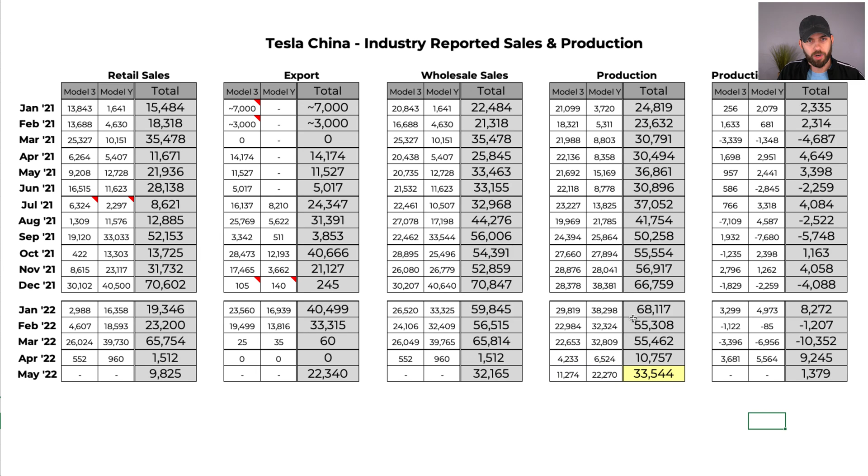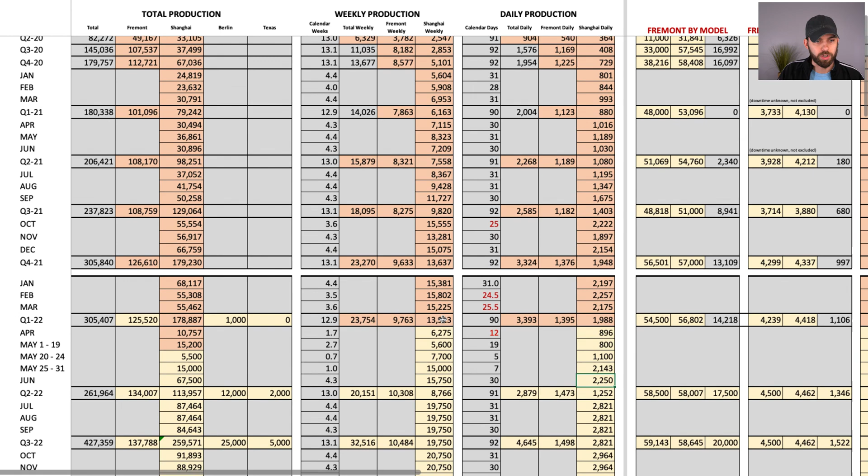So first I want to zoom in on where we were before this, what we were mapping out based on some of the rumors we had heard. This had put May at around 35,700 as the last forecast, based on Tesla hitting that 2,500 per day production rate around May 25th. That would have given them roughly 15,000 vehicles produced through the end of May, putting us around 35,000. So they didn't quite get to that.

But then for June, previously Reuters reports had put June production at around 15,750 per week, and now they're saying target of 71,000. We can go back to that article, but they also said from June 13th they're targeting weekly production of 17,000 vehicles per week, which would be higher than what we've got in here. So anyway, that was mapping out to like 262,000 vehicles produced for the quarter.

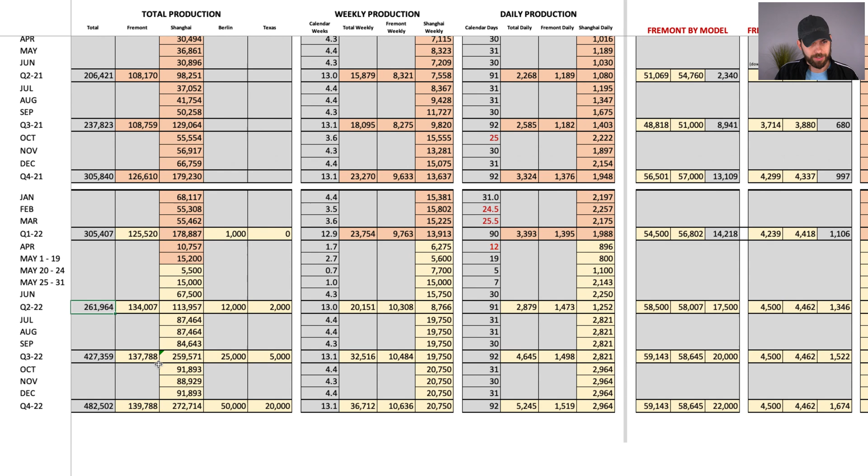If we flip over to this updated scenario with our known May quantities, I've just put the numbers in there for May. So we're at 33,500. I have those broken up by the different time periods we have information on for May. And then if June comes in at 71,000, that would put Q2 for Shanghai at 115,000.

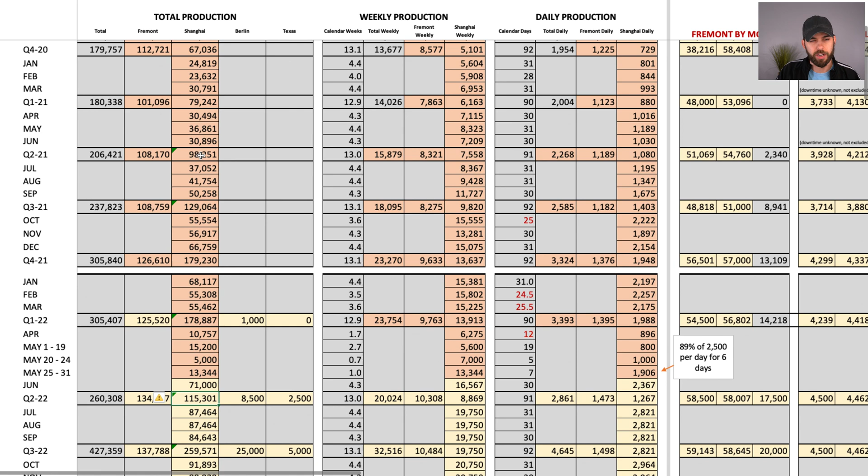That would be slightly up from last year, just because I believe there were some shutdowns going on - I can't remember exactly what was happening last year. I'd have to look back, but it would actually have Shanghai up from last year, but still down pretty significantly, about 60,000 vehicles quarter over quarter, which is just going to be too much of a stretch to make up from the combination of Fremont, Texas, and Berlin.

So if we assume some sequential increase here from Fremont, which looks like things have been trending in that direction, maybe 134,000 up from 125,000, and then maybe we're getting like 10 to 12,000 out of Berlin and Texas combined.

I'm hoping this is a little bit low for Texas at 2,500 in here, now that we're starting to see these deliveries and Tesla seeking out more buyers. But I think Berlin has been trending a little bit slower than what we might have had earlier in the quarter. Anyway, all these things combined are, to me, shaking out somewhere around 260,000 for production.

And again, that's production, so deliveries could vary pretty significantly. For that 71,000 for June, that would shake out to about 16,500 per week, which would again line up with the second half of the Reuters report. Obviously it's all from the same source, so it makes sense, but that's kind of how that's shaking out.

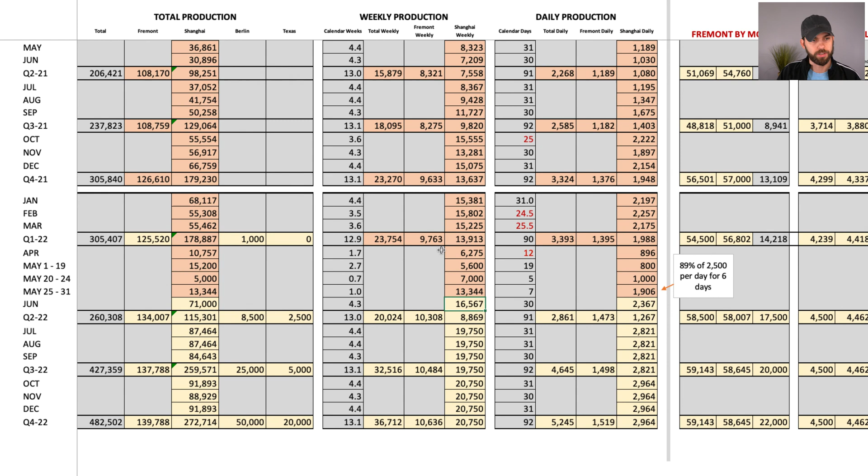That would lead to then a potentially higher production rate later in the quarter, or into Q3, I mean. So the other thing here for May is this 1,900 per day rate that we saw for the last week of May. That would be 89% of the 2,500 per day production rate that we had heard Tesla had hit, assuming that was operating 6 days on a 7-day week. That would come out to 2,150 or so per day.

So just wanted to point that out, because we had that Reuters report that said Tesla was only at 70% of production, and it looks like they were quite a bit higher. So I think that was just sort of cherry picking some numbers. Just kind of good to keep that in mind.

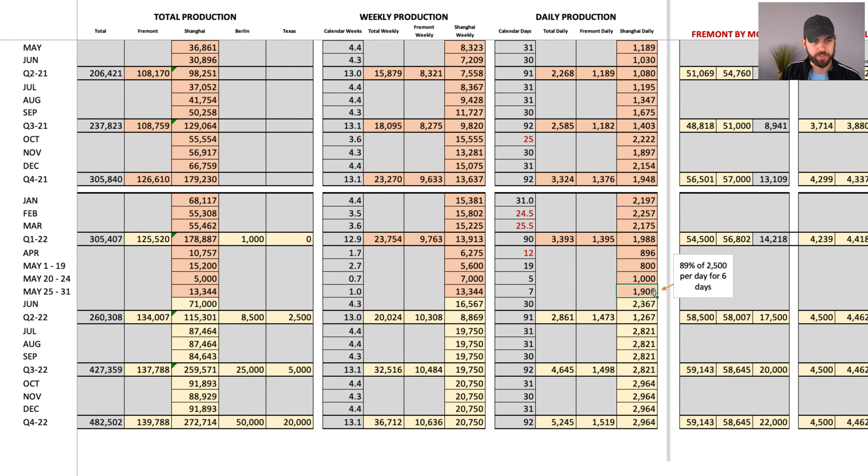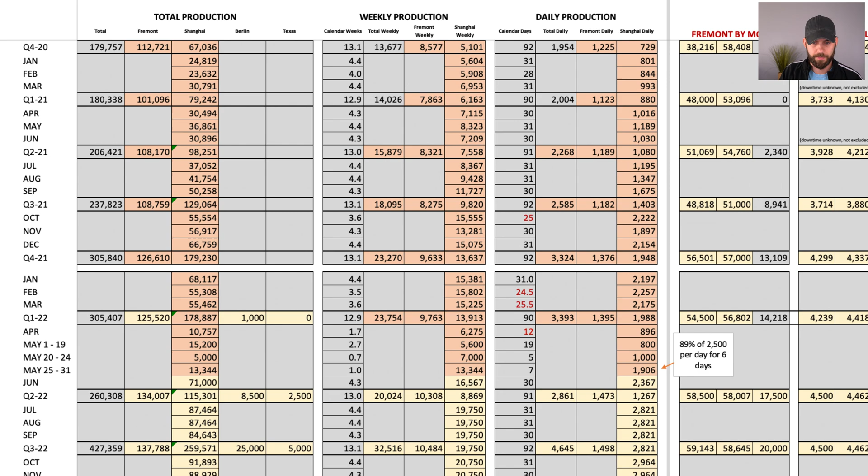All right, so the next thing we've got here, let me flip back and point out that Reuters report, just so we make sure we cover off on that. So what I mentioned here - aims to produce 17,000 cars per week from June 13th. And then they also say that 2,600 units in May, they were only able to do so at the end of the month. But of course we know that happened a little bit earlier than actually the end of the month. So that's the situation in China.

That's kind of how I'm seeing it shake out for Q2 - again, 260,000 production, could be a little bit lower on deliveries because Tesla is so low on inventory and production is going to be backloaded, so inventory would probably grow. But I've said that a lot the last couple of quarters, and Tesla has kind of defied that. So we'll see.

All right, let's move on here. We've got more information today on the standard range Model Y coming out of Giga Texas, so the 4680 vehicles.

Here we've got an update from Spoken Reviews, who we had talked about yesterday.

This person took it to a supercharger. They got it down to 9% and charged it all the way to full, up to 97%, which in total ended up taking about 50 minutes.

For peak rate, this was on a V3 supercharger, which of course could hit 250 or 253-ish. So not quite getting up to that level, but again, this was at 9%.

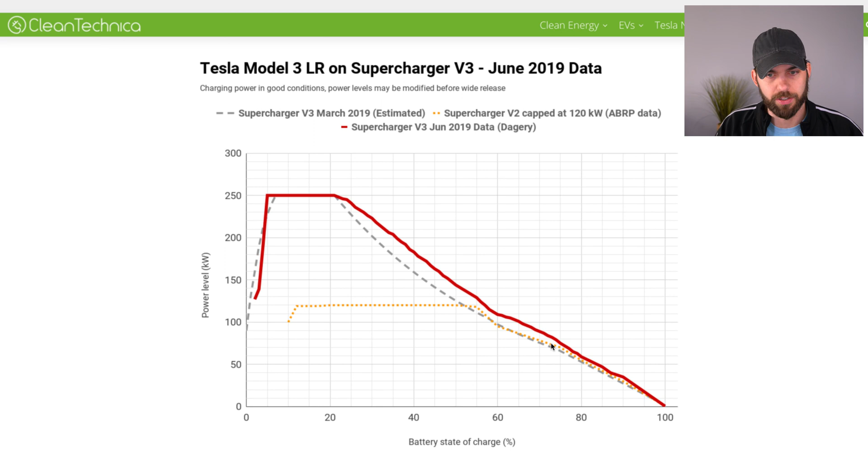Here you can see at 80%, they were getting 50 kilowatts. So if we come back here, that starts to get much closer to what we have seen from the Model 3, which is 50 kilowatts here, probably at 55, or I guess 60 that would be. So not a huge difference, but even still a little bit below on that curve.

So I think I mentioned, it was about 34 minutes to get from 9% to 80%, and 50 minutes to get from 9% to 97%.

The other thing that was kind of interesting that came out today from Spoken Reviews, they were able to see on the mobile app that Tesla is actually labeling this as a 50D Model Y. So I wanted to talk about this because obviously we don't know the battery pack size in the Model Y, and we talked about some of the confusion on efficiency yesterday. We've seen Tesla historically mark cars like 75D, 100D in line with the battery capacity.

If this Model Y had a 50 kilowatt hour battery, that would be very, very good news for Tesla, very bad news for everybody else. I don't think that is the case, though. This would suggest that Tesla's efficiency in watt hours per mile would be quite a bit lower than, or the efficiency would be higher, the watt hours per mile would be quite a bit lower than what we're seeing on the EPA data or even in real world testing.

The same Spoken Review video was showing his watt hour per mile at 70 miles per hour on the freeway at somewhere around 250 watt hours per mile, and then also his entire trip was like 290. If we're at a 50 kilowatt hour battery, let me just do some super quick math here. So 50 kilowatt hour battery, and now I forgot what I needed to do.

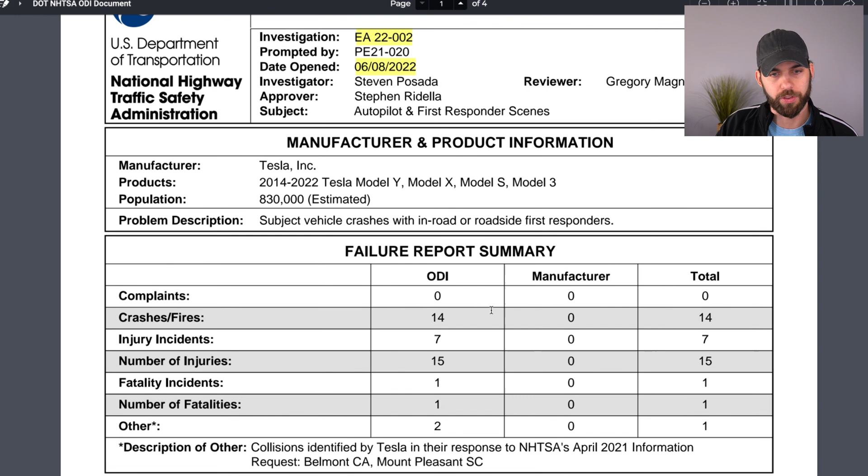This is on the entire Tesla fleet in the US that has these vehicles, and you can see that this has been upgraded from a preliminary evaluation to an engineering analysis. So we'll go through the details here, but just to give people context on what that means.

They basically start the investigation process by looking into reports, and once they kick off the investigation process, that starts with the preliminary evaluation. If from that preliminary evaluation they conclude that additional information, testing, or analysis is needed, then the investigation gets escalated to an engineering analysis. So that's where we're at today.

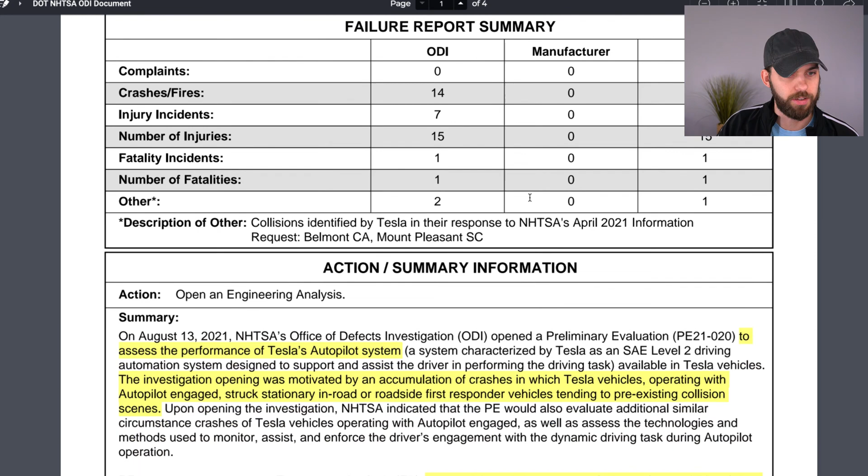Then, based on the work done in either of those stages, if there's sufficient evidence to conclude there's a defect related to vehicle safety, the manufacturer would be forced to issue a recall based on NHTSA's findings. So that's basically the process: preliminary evaluation, engineering analysis, potentially forced recall, and we're in engineering analysis right now. Oftentimes though, as NHTSA points out, they'll just work with the manufacturer to do a voluntary recall before actually forcing them to.

So we'll try to go through this relatively quickly, but again, just want to make sure people understand the full context here. They talk about the preliminary evaluation to assess the performance of Tesla's Autopilot system. It doesn't specifically mention first responders there, but it says the investigation opening was motivated by an accumulation of crashes related to first responders.

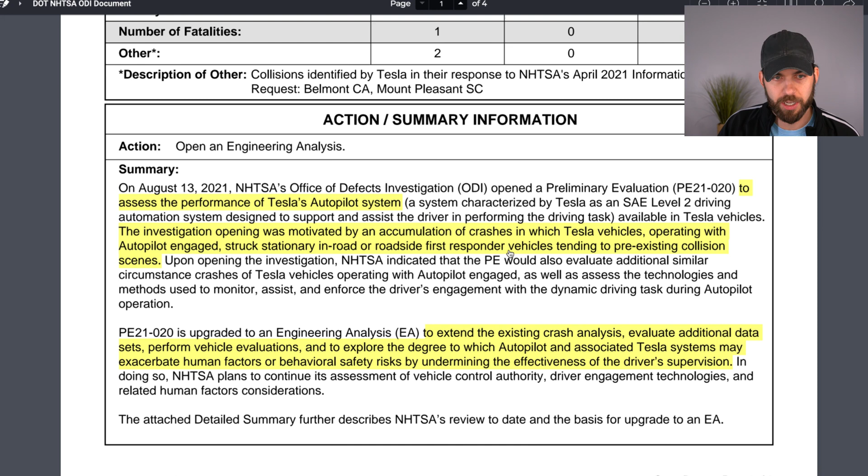But then with this engineering analysis, they're saying that they're extending their process on the existing crash analysis to evaluate additional data sets, perform vehicle evaluations, and explore the degree to which autopilot and associated Tesla systems may exacerbate human factors or behavioral safety risks by undermining the effectiveness of the driver's supervision.

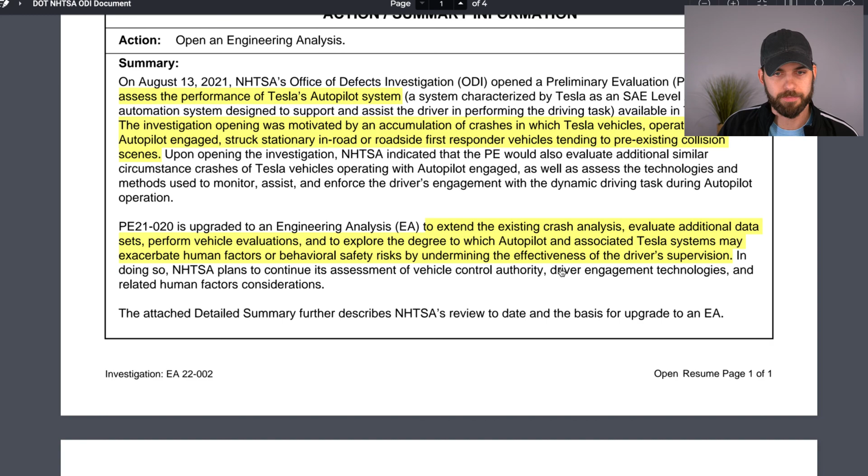So that's the big thing. They're not just looking at that scenario, they're saying, okay, is autopilot actually making people's inattentiveness worse in some circumstances? And is there anything Tesla can do to make that better? So that's really what they're investigating at this stage.

They've got a lot of details here on what their investigation has learned so far. They talk about the, I think there's like 18 crashes or something that they looked into. In those crashes, they say forward collision warnings were activated in the majority of incidents, automatic emergency braking was in approximately half of those, and on average in those crashes, autopilot aborted vehicle control less than 1 second prior to first impact.

I kind of wanted to highlight that because when Tesla reports their autopilot crash statistics, that would count as an autopilot crash, even though it's aborted slightly prior to the crash. Tesla says that if that happens within 5 seconds, that's what they're counting as an autopilot crash. So we've seen Tesla's safety statistics in terms of accidents per mile on autopilot, and they are quite strong. So even though we are seeing some crashes, it's important to keep that in mind. Obviously different data sets, so nothing is directly comparable, but just something to keep in mind.

They also say that when they had video evidence of what was happening in these crashes, the first responder scene would have been visible to a driver on average 8 seconds up to impact. So that's giving NHTSA the idea that drivers just aren't really paying attention, which I think we can all agree is the case.

They talk about how they extended to review 191 crashes. They ended up removing maybe a third of those because of other factors, like the other vehicle being at fault. They looked at those remaining 106 crashes. Approximately half of those had indications that the driver was insufficiently responsive to the needs of the dynamic driving task, as evidenced by the drivers either not intervening or intervening through ineffectual control input.